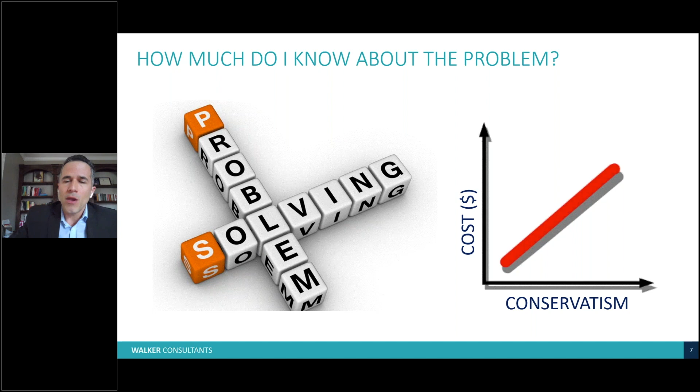This thing looks like a horror movie. The client was very concerned when they called me and showed me this cracking. They said, well, it's the sky falling - this looks like a big problem.

They actually had a recommendation from a consultant to replace the columns, which was in the order of several million dollars. So they asked me to take a look at it and give my opinion. This is where forensic engineering comes into play.

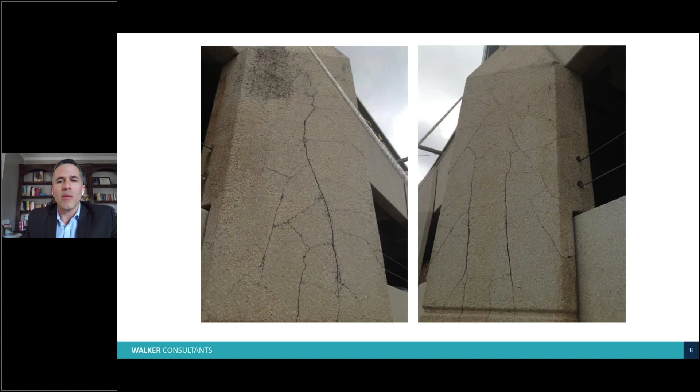We can take a look at it further than just visually to really understand the problem. The first thing we do is look at the entire elevation, the big picture, where the cracks are located, how closely spaced they are, to understand if there's any pattern in the cracking.

The next step is we look at the reinforcement. We use a technique called ground penetrating radar testing, a non-destructive evaluation technique to estimate the location and spacing of steel reinforcement.

What you see in the photograph on the right is the face of the column, and on the left is the output from the ground penetrating radar testing machine. The red dotted lines are the location of the steel reinforcement.

There's a lot of steel reinforcement intersecting these cracks. That was good news for the owner, because that means there's plenty of steel reinforcement maintaining the cracks tight and maintaining the integrity of the concrete.

I want to direct your attention to this yellow rectangle - that's the area where the load is being transferred from the floor deck to the columns. That area had no cracking; it was in really good shape, which is also good news for the owner.

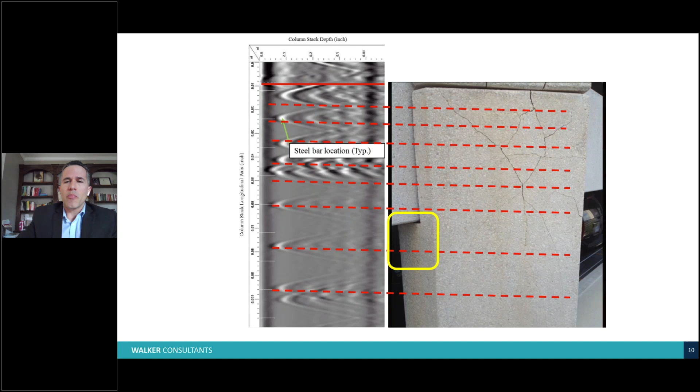That's one step of the process in this forensic investigation. The other thing we did is take core samples from the columns themselves. This particular photograph shows a core sample taken at a crack location.

In the photograph, the left side shows the outside of the column, where you can see the crack is a little wider, and then it narrows as it gets to the middle.

And this is also good news because the strength of this concrete column is really in the center of the columns, inside what's called the cage, the steel reinforcement cage. What's on the outside of the steel reinforcement is more for durability purposes and also for fire code type purposes. So this is also good news for the owner.

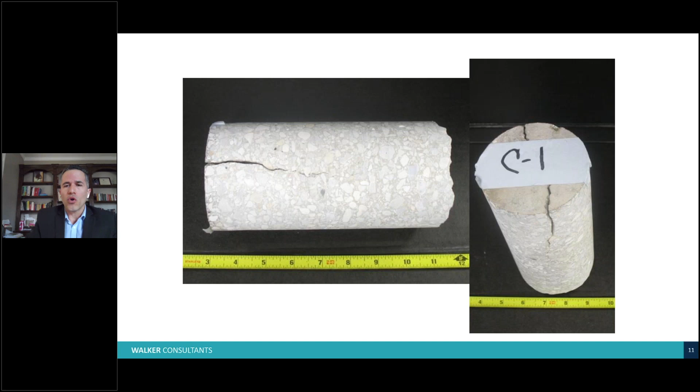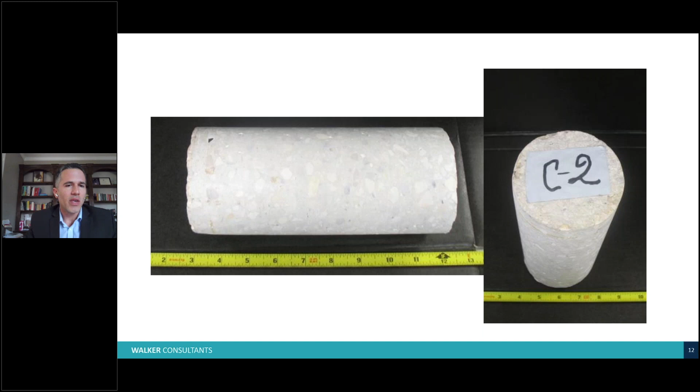So as you can see, we're kind of starting to put the pieces of the puzzle together. We also took some concrete core samples at a location where there is no cracking, called a control sample, to compare to the location where there is distress and see if there's any differences. So from here we take those samples and send them to a lab where a petrographer, a scientist who looks at concrete under a microscope, can tell us different things. We want to evaluate the material component to see the significance of these cracks.

The petrographer also looked with much higher magnification at very thin sections of the concrete cores. What they told us is that there's a couple of expansion mechanisms occurring from within the hardened concrete. In this figure, what you see is a mechanism called delayed ettringite formation, or DEF, an expansion mechanism that occurs in the paste of the concrete. There are two things that need to happen for that mechanism to occur: there needs to be ettringites, which are part of the cement clinker, and there's nothing you can do about that, it's just part of the concrete.

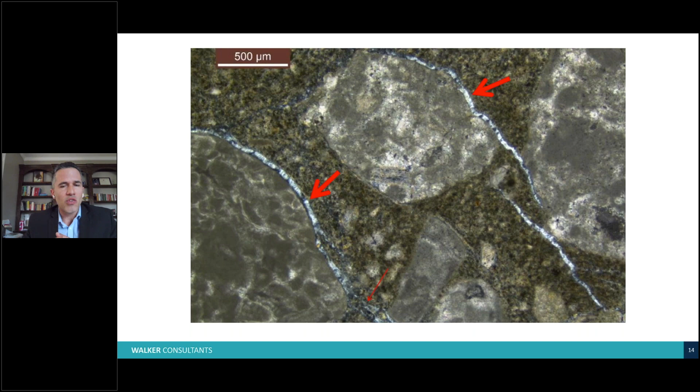And the other one is moisture. So which means if you don't have moisture present, you don't have the expansion mechanism. That is good news for the owner, because that moisture could be controlled. In terms of relative humidity, we're talking about 70% or so. So we can keep that relative humidity down and minimize this mechanism.

And the same thing, this is another figure that shows another expansion mechanism. This particular one occurs from within the aggregate. You can see the two yellow arrows pointing at that dark line. That is the expansion mechanism that occurs from within the aggregate, called alkali silica reaction, or ASR. This mechanism also needs moisture in order to react.

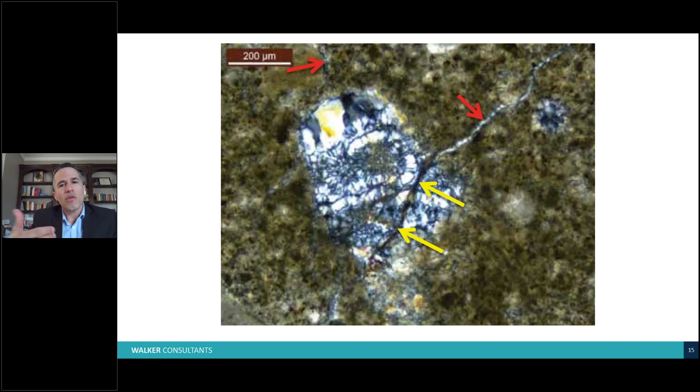So after knowing all this, basically what we found is that the cracking mechanism really doesn't have any structural relevance. The columns structurally were sound, and really the cracking occurred on the outside face of the columns. The importance of that is that a repair only involved sealing the cracks and applying some surface penetrating sealer to control the amount of moisture that gets into the concrete. If there is no moisture, or the relative humidity is below 70, then you don't have the expansion mechanism, you don't have the cracking, and you don't have to replace the column.

So this went from a $6 million project to a few hundred thousand dollar type of project. So you can see from a cost standpoint the importance of going through this process to really understand the significance of the crack. Even though they look really bad, this cracking wasn't really that relevant from a structural standpoint.

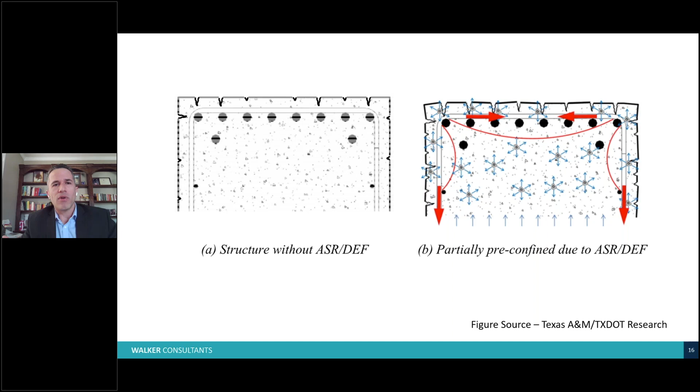So the other concept, I want to go back to the introduction. We were talking about the concepts here: defect versus deficiency. In this particular case, these columns are classified, or this cracking is really a defect, but not a deficiency. And to illustrate that better, I can give you an example. For instance, my car, I have a car that's got all kinds of defects.

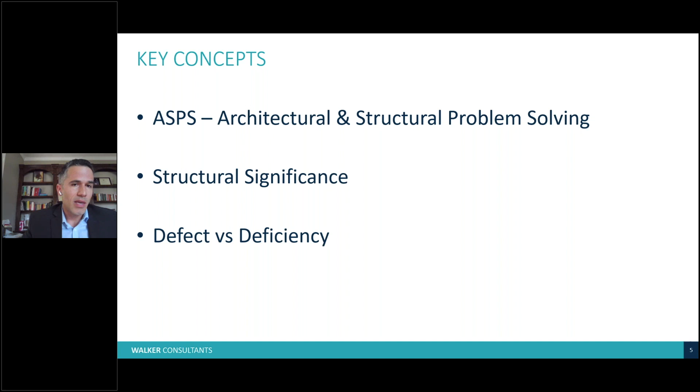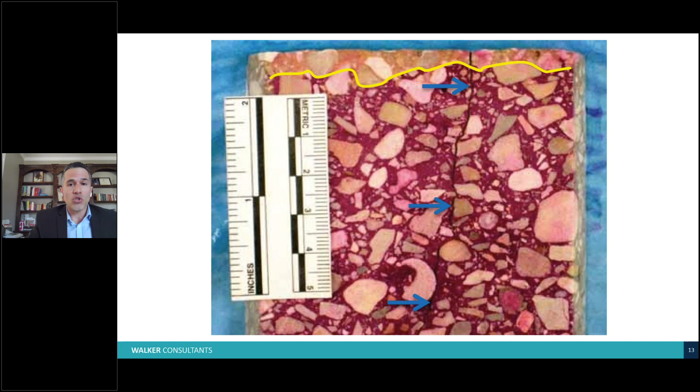It's got chips in the paint, maybe some chips on the windshield, tires a little worn out, but it'll still take me from A to B. So it'll still perform its intended purpose, which is to provide a means of transportation. So even though it has defects, it's not deficient. That's a very important distinction here, because it impacts the cost, whether we're dealing with a conflict resolution or a restoration type scenario.

Initially, a study was done by a firm that attributed the failure to deflection of the framing on the roof. The framing consisted of open web steel joists. They attributed it to ponding due to rain, the joists deflected, and it caused the failure.

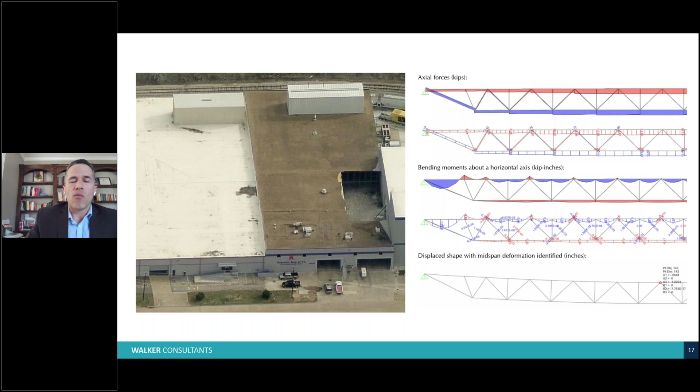But when we did the investigation, we found that this was a pre-existing condition. It turns out this building had a design deficiency, which was actually allowed by the building code at the time that this structure was built.

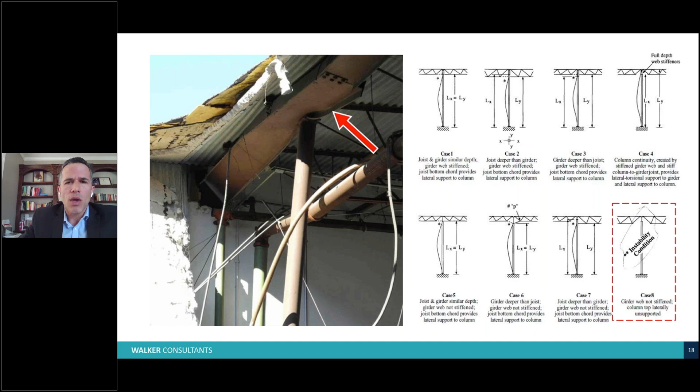It was really the lack of lateral stability for the framing at the beam-column connections. There are ways to repair it. I don't want to dive too much into the details, but it can be repaired by adding bracing to the top of the column, either with web stiffeners or by extending the bottom chord of the open web steel joist.

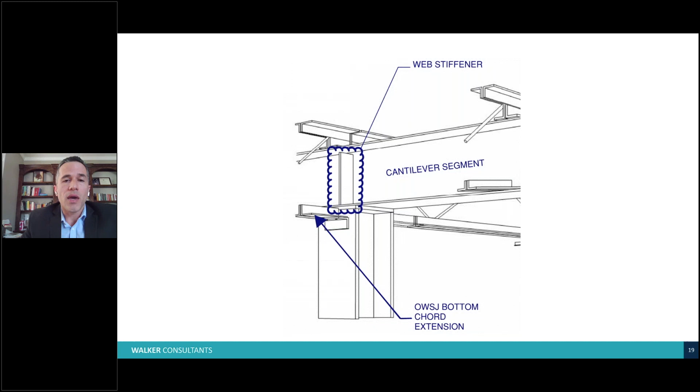So in this particular case, our forensic investigation allowed the owner—in this case it was an insurance claim—to come up with a conflict resolution that was favorable to the client.

Now that was the first part of the presentation, kind of an introduction about some of the terms, and I tried to illustrate the concept with a couple of examples. Now let's talk about the investigation process. There are basically two methods: the deductive method and the inductive method. We're getting a little more technical here, but I think it's important to understand the big picture of how forensic engineers think and go about their business.

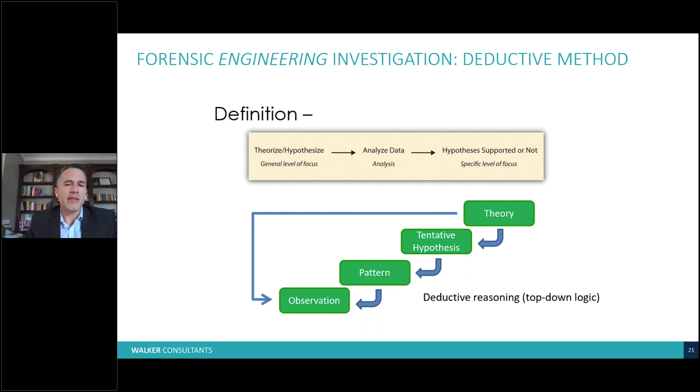The deductive method is a top-down approach where we start out with a theory when we see the condition, then we start making observations, establish a pattern, and develop a tentative hypothesis to see which one proves the theory. Let me give you an example.

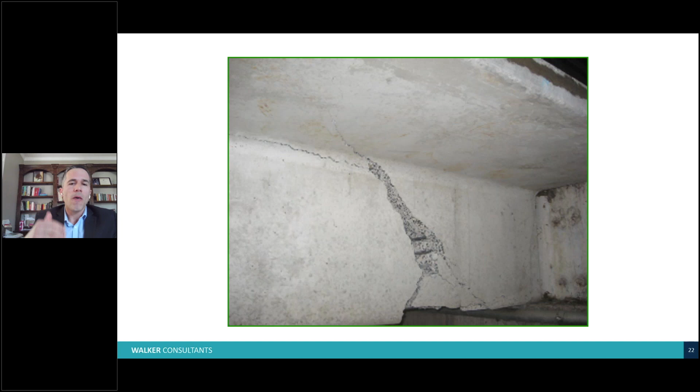But after we looked at this and did more investigation, it turns out this element was hit by a vehicle, and the type of failure here was actually torsion. The crack pattern went diagonal on one side and vertical on the other, which is more of a torsion pattern. So in this case, the pattern of failure didn't match the initial theory, but after performing the investigation, we were able to come up with the right conclusion.

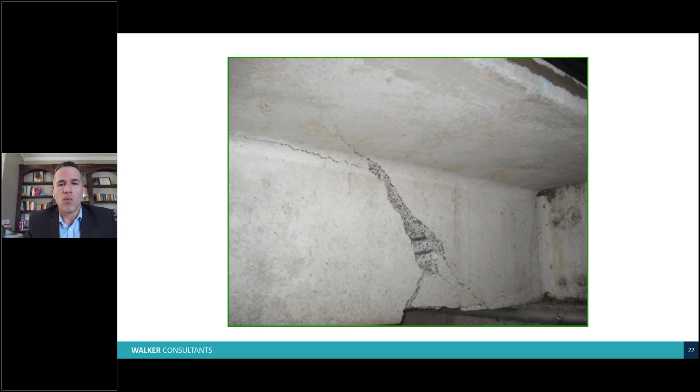The other method is called the inductive method, which is a more logical, bottom-up approach, where you start out by making observations, establishing a pattern, having a couple of hypotheses, and then developing your theory based on that.

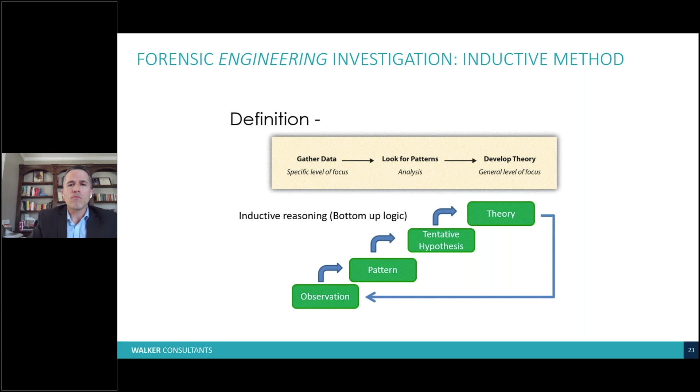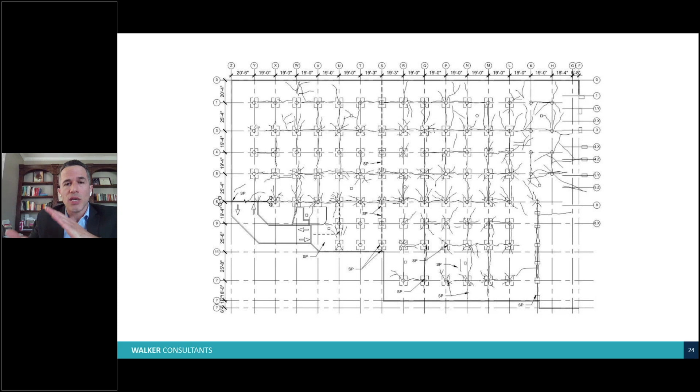Typically there's a couple of scenarios that could be going on. When you see radial cracking around a column on a concrete structure like this, it could be punching shear. However, punching shear is a very sudden failure, and the cracks are very sharp. In this particular case, it didn't fit that pattern.

Also, the cracking was through-thickness, which is evidence typically related to restraint to thermal movement. So in this particular case, this cracking was not a structural problem, because punching shear is a significant structural issue that could cost a significant amount of money to address. Here, it's just restraint to thermal movement, which is very inexpensive to fix by routing and sealing the cracks.

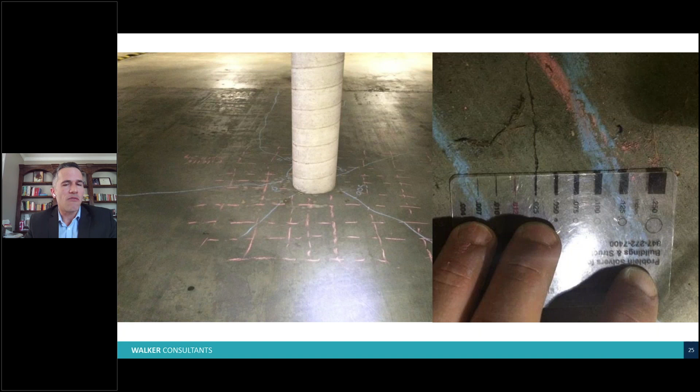So with that, I'm going to turn it over to Charles, who is going to go over some case studies to dive a little bit more into some of these concepts. Charles: All right, so I'm going to cover a couple of case studies to highlight the inductive method that Al mentioned.

The first one is a case study about two parking garages located in the Austin, Texas area. These two garages were pretty much identical in their construction date and methodology, and essentially the drawings are the same. Both of them suffered from cracking that was observed in the spandrel beams on the perimeter of the garage.

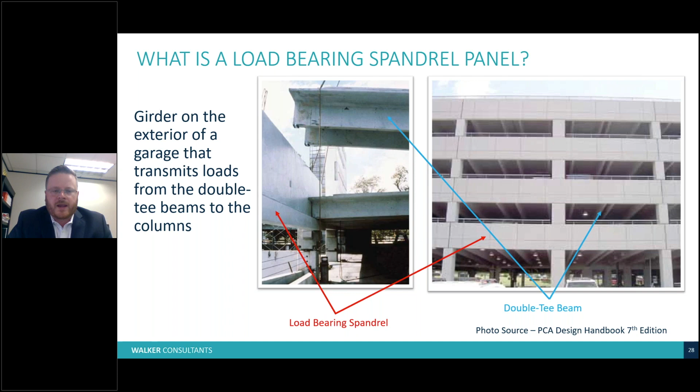Just to give you a little more context on what exactly that is, a spandrel panel is generally a load-bearing girder that's on the outside of a structure that supports the framing. So it takes a lot of load, and you can see highlighted in red the load-bearing spandrel that in this case is supporting some precast double T's. So that's really the member we're talking about here, shown in cross section as you can see in the photo on the right.

So what we observed was diagonal cracking near the support. Here's a couple more photos of that.

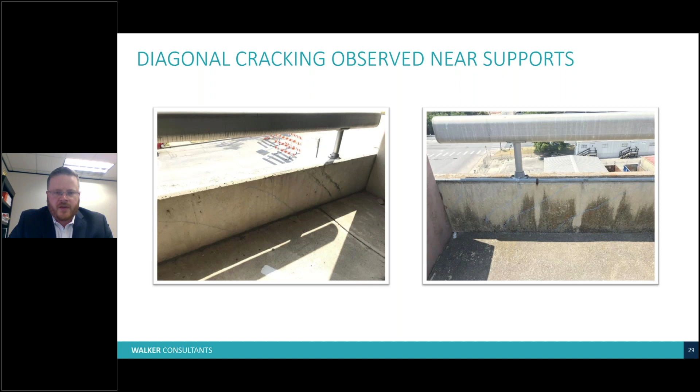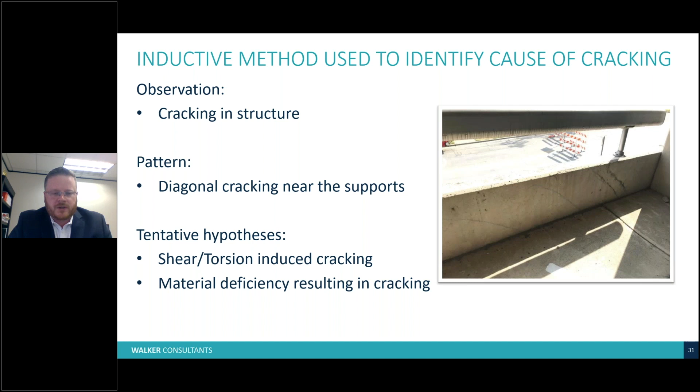Following the inductive method, the observation is that we have cracking in the structure. The pattern that we see is diagonal cracking near the supports, and that leads to our tentative hypotheses: this could be, as Al mentioned earlier, diagonal cracking near support that's often shear and/or torsion induced cracking, but it could also be a material deficiency.

So those are a couple of hypotheses, and the theories supporting that are: okay, well if it's a load-induced crack such as from shear torsion, maybe the structure was overloaded. Or maybe another possibility is the original construction could have been deficient — maybe the reinforcing steel put into the member didn't match what was shown on the drawings.

Maybe there was a material deficiency. Another option could be that the original design was deficient, maybe it was never designed to meet the anticipated loads it would see in service, following the building code it was designed to. So evaluating these theories one at a time, first, was the structure overloaded?

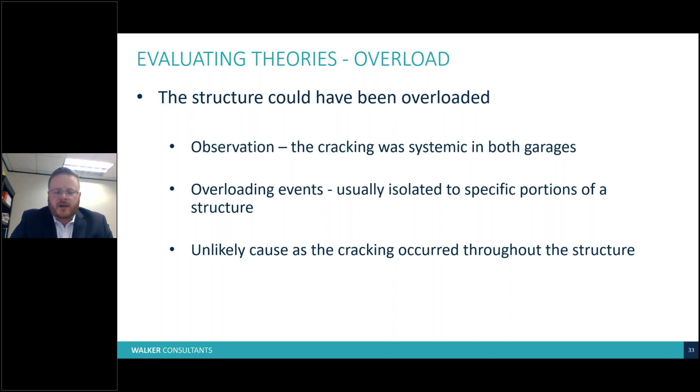The observation is that the cracking we saw was systemic in both garages, occurring everywhere. Overloading events are often isolated to specific portions of a structure. One job I had was where a fully loaded concrete truck drove onto a parking deck and punched a hole through it. Similar to that, these things usually don't occur everywhere if it's an overloading event. Based on our observations, while it's possible, it's really unlikely that overloading was the cause of the cracking observed throughout both structures.

Evaluating the next theory: maybe the construction was deficient. In other words, the spandrel beams were not built per the original construction documents, the drawings, the specifications. That could have been improper reinforcement size and/or spacing, or even a material deficiency.

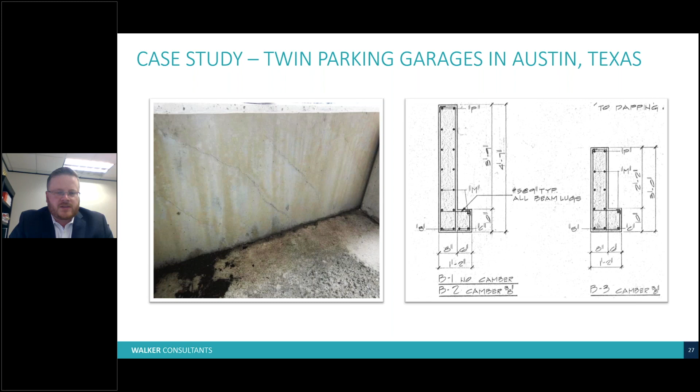Another theory was that improper materials were used, which could have caused cracking. Maybe there was delayed ettringite formation due to steam curing, or maybe there was alkali-silica reaction due to a highly alkaline cement used in combination with a reactive aggregate.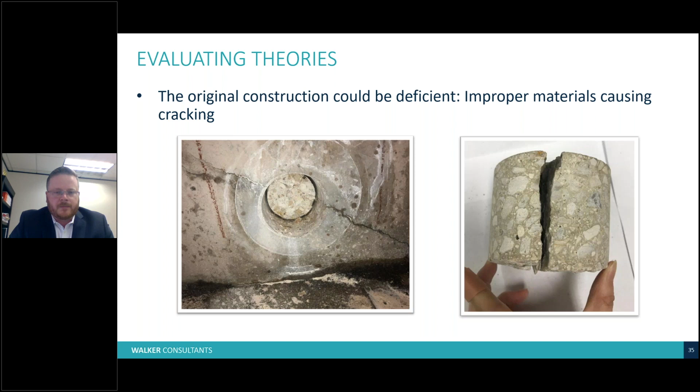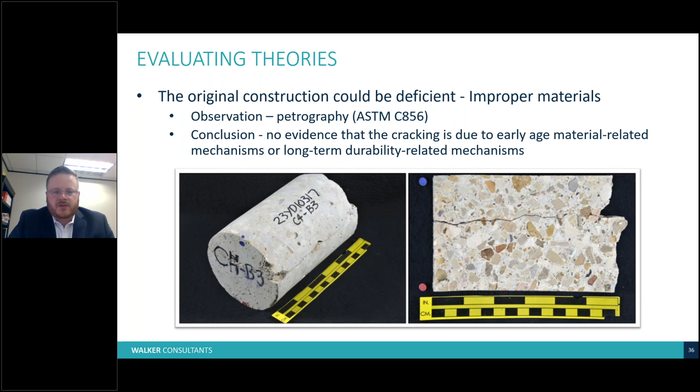We had those cores shipped off to a petrographer who performed a petrographic investigation per the applicable ASTM standard, C856. The petrographer's conclusion was that there was no evidence showing the cracking was due to early age material related mechanisms or long-term durability related mechanisms. In other words, there was a very strong likelihood that this crack was a load-induced crack.

So moving to our next theory: was the original design deficient? We performed structural analyses on the original design to see if it met the code in use at the time. What we found was that the original design was deficient for the combined shear and torsion loading — in other words, it had an inadequate spacing of the stirrups.

What would have had to happen is they would have needed a much tighter spacing. The table at the bottom left shows the required stirrup spacing based on the structural analysis performed, and the column on the right shows the spacing of the stirrups in the original drawings at the critical section. Of note is the highlighted beam labeled B1, where the required stirrup spacing is just a little more than half of what was actually provided. Unfortunately for the owner, this beam occurred at 47 locations throughout the garage, so there was a significant design deficiency very prevalent throughout the structure.

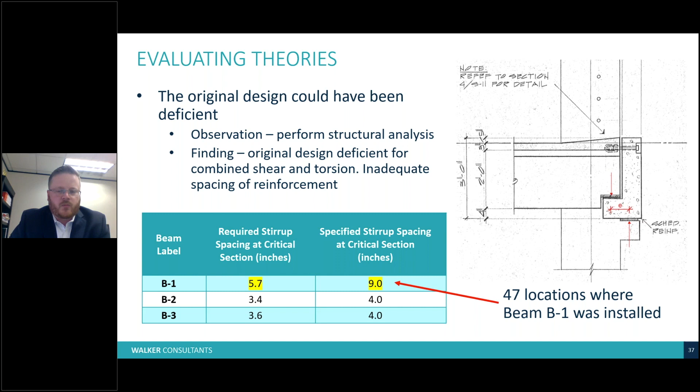The value we bring in identifying this cause of cracking is, one, we're able to identify the cause, but two, by identifying that, it allows the structures to be repaired prior to further deterioration occurring from a durability issue with the cracks or even a collapse. So the value is really finding this issue early, before something worse could happen — in the worst scenario, somebody gets hurt, and inevitably litigation would follow.

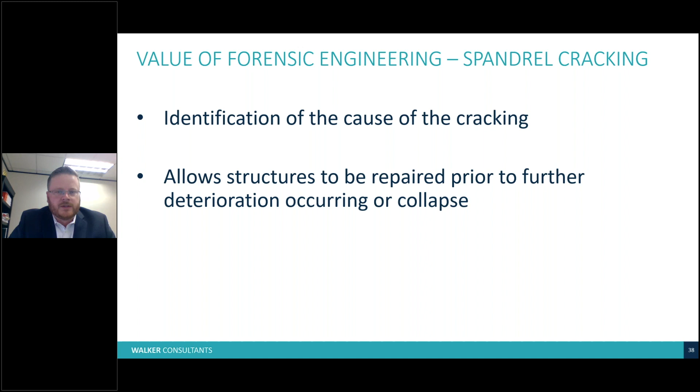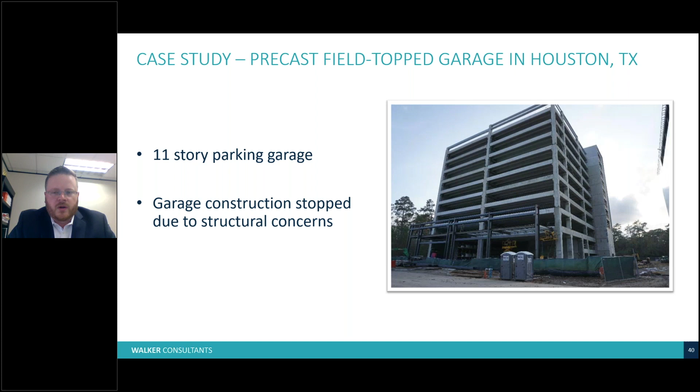The second case study is a garage in the Houston, Texas area, shown in the photo on the right. It's an 11-story garage. This photo was taken during construction. We got called out because construction was stopped due to concerns with the structure—they had seen some distress that worried them enough that they didn't want people in the building for fear of a collapse.

What was observed when we went into the field was cracking in this corbel that you can see here. And it wasn't just this corbel, it was actually a number of corbels.

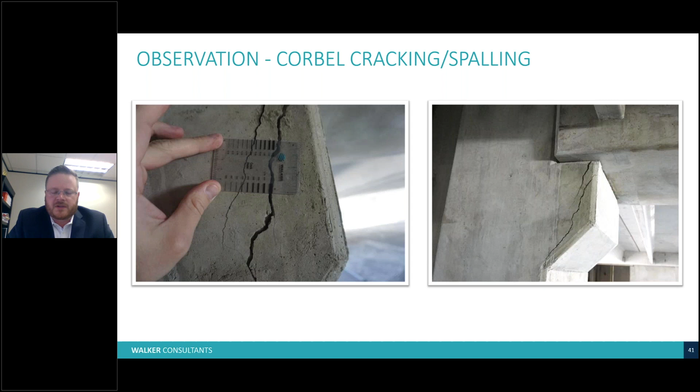A little bit about what a corbel is: a corbel is part of a column that's used to transmit load into the column. In this case, the column supports an inverted T-beam, which supports the horizontal framing. So there's a lot of load coming through this connection and then down into the column to the foundations.

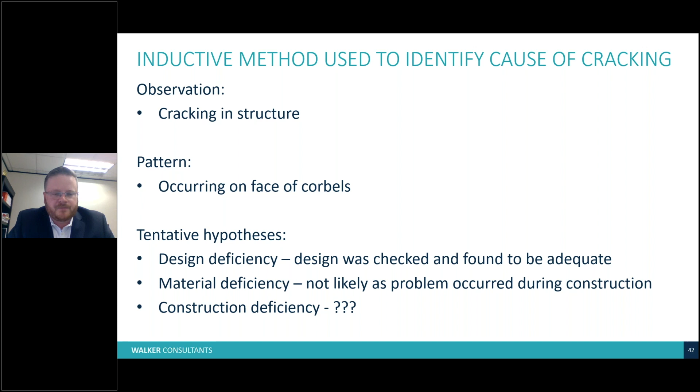So the observation, similar to the first one, was that there's cracking in the structure. The pattern was that the cracking was occurring on the face of the corbels, so our tentative hypotheses were: maybe it was a design deficiency—we checked the original design and found it to be adequate. Maybe there was a material deficiency, which we generally ruled out because this problem occurred during construction, and issues like ASR and DEF tend to occur later in a structure's life. That left the third hypothesis: maybe it was a construction deficiency.

I'd like to take this time to talk about stress concentrations. Concrete surfaces are inherently rough, and bearing pads are used to distribute concentrated loads over a bearing area.

To simplify that, think of an analogy for those of you with kids. You've probably at some point stepped on a Lego, which hurts really bad if you don't have shoes on, because that Lego is providing a concentrated load into your foot. However, if you wear a shoe, the rubber sole distributes that load over a larger area on your foot, and it doesn't hurt as bad.

The corollary is that in concrete structures, precast concrete structures in particular, bearing pads are used to distribute concentrated loads over the full bearing area to avoid stress concentrations.

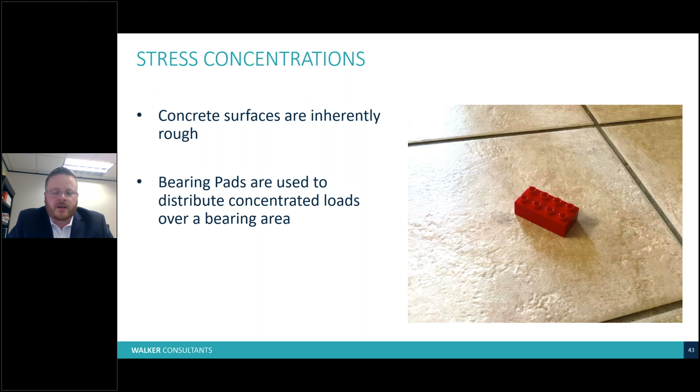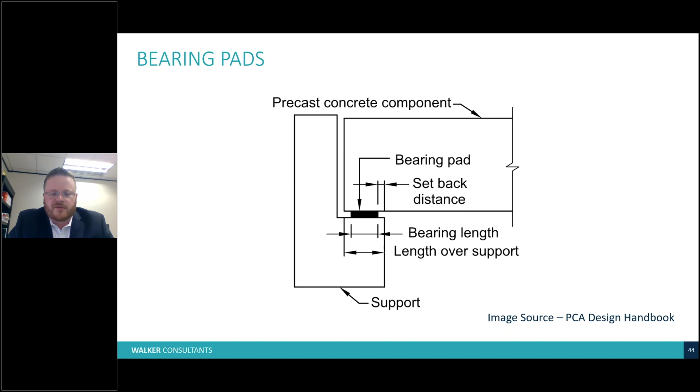Here's an image showing what a bearing pad would look like in a structure, represented by the black box supporting a concrete member on an L-shaped beam. So that load from the beam is transferred to the L-shaped girder through the bearing pad, which makes for a nice uniform distribution of stress.

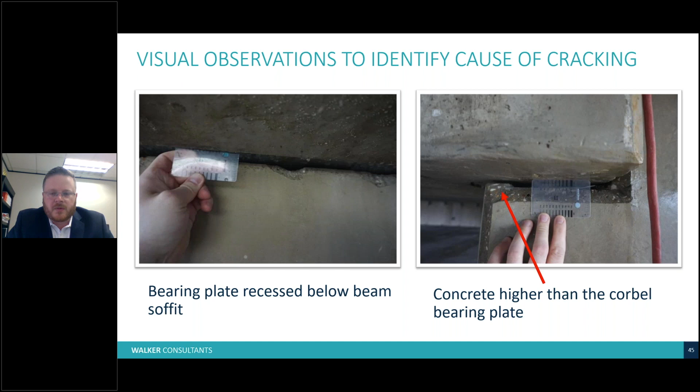When we came back to this garage to try and identify the causation, what we see is that the plates on which the bearing pad bears were actually recessed within the concrete member. If you look at the photo on the right, there's a red arrow showing a concrete projection above the surface of the bearing plate. That means the load was not traveling as intended from the inverted T through the bearing pad into the column, but rather it was all going through this small projection of concrete above the surface of the bearing plate, which leads to a stress concentration and ultimately the cracking that was observed in many locations through the garage.

The solution to this was to put a temporary column in, which is effectively shoring, and repair the spalls while construction could continue, and where possible, grind the projecting concrete from around the bearing plates.

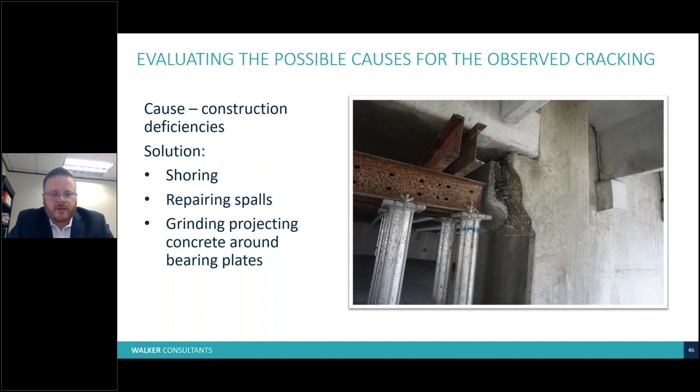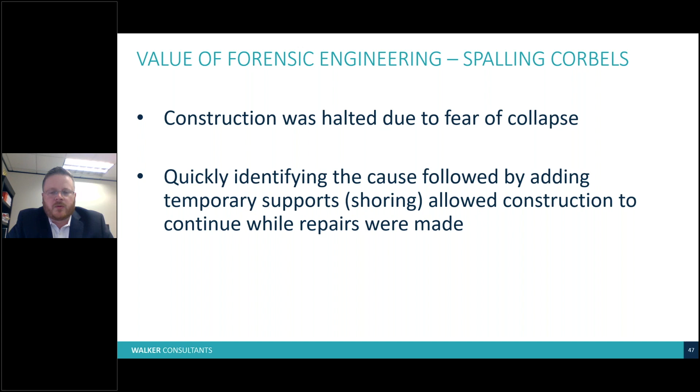The value we bring in this type of scenario is that when we got to the job, construction was halted due to fear of collapse. As you can imagine, stopping a construction project for a long period of time can result in lots of damages that will come up in litigation. By quickly identifying the cause and adding temporary supports—in this case shoring—we were able to allow construction to continue while the repairs were made.

So in summary, forensic engineers identify the cause of damage to a structure. And in doing so, we can help determine the different parties' responsibility for the corrective actions that are required to restore that structure. We can also assist in determining what the appropriate corrective actions are.

We're uniquely qualified as forensic engineers because we provide these architectural and structural problem-solving services on a daily basis. It's something we do day in and day out. Getting a forensic engineer to look at something can ensure that the corrective action recommended is correct and the cause is properly identified. The value we ultimately bring is by mitigating damages and determining cause in an efficient manner based on our unique education and experience.

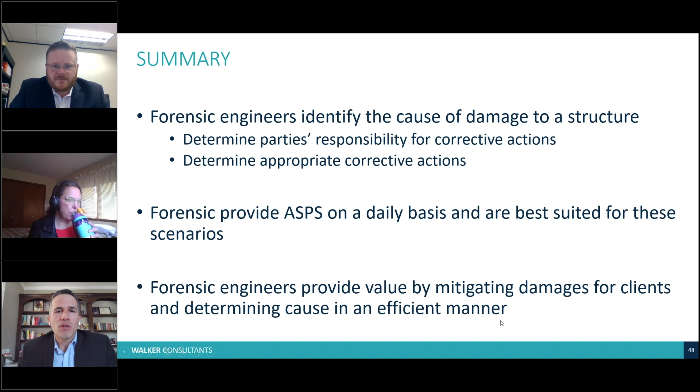My theory is that because these columns were part of the critical path on the schedule, the precaster was trying to get them out of the precast plant as fast as possible, so they used steam curing to accelerate the curing process. But that introduced this DEF type of expansion mechanism that actually occurs later in the life of the structure in the presence of moisture. That's my theory. We never had the precaster information to know exactly, but that's my theory on that.

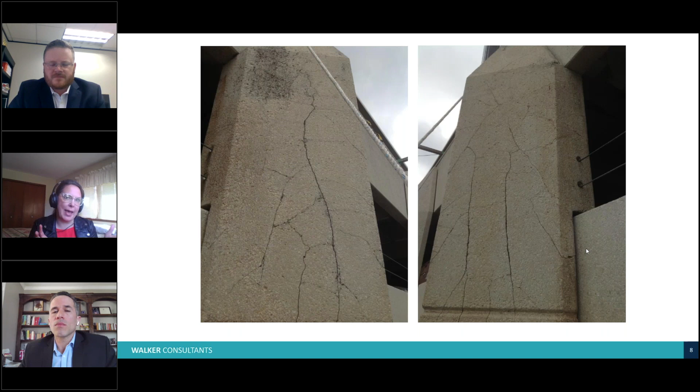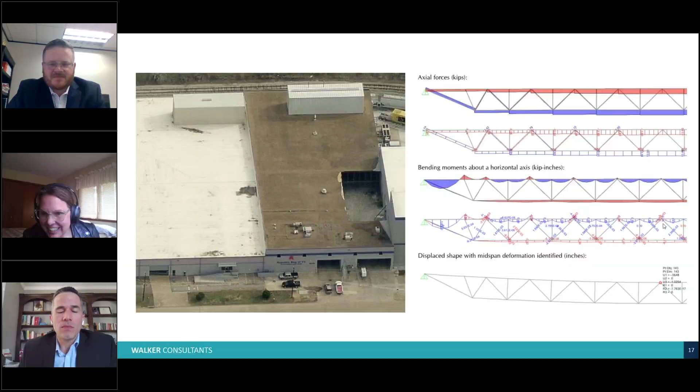Great. Well, not great for the structure, but thank you for that explanation. Sure. I don't see any other questions coming in. And then I have one more question.

Is corbel cracking common in precast parking structures? Is that something you see quite a bit? Sure, I can take this one. I guess the short answer is no, not really, especially if it's a properly built garage. It's something we do come across, but there's usually a construction defect or design defect that leads to it. So in properly built garages, it's seldom seen, but it does occur.

Great. Is full-scale structural modeling of buildings typical in forensic investigations? I can take this one.

It depends on the problem. Every job is really unique. So in some jobs, depending on the behavior we're trying to understand, yes, we would do a full-scale structural model. So the answer is it really depends. I've done full-scale structural models for many jobs on the forensic side, but it's probably a fraction of the total. Maybe 10% of the jobs would I ever end up modeling the full structure. It really just depends on the distress identified, the distress type. I don't know, Al, do you want to add to that?

Sure. I think sometimes on a legal case, if you're trying to show graphically how the structure behaves, it can help, particularly in a scenario where non-technical folks, non-engineers, are trying to understand what's going on, like when you're trying to show a jury. I think having a graphical model, and there's certainly a computer model developed for structural analysis, but there's also a model built to show the behavior graphically. It could be used, but again, as Charles pointed out, it depends on the particular project. It's not uncommon to see computer models built on forensic cases.